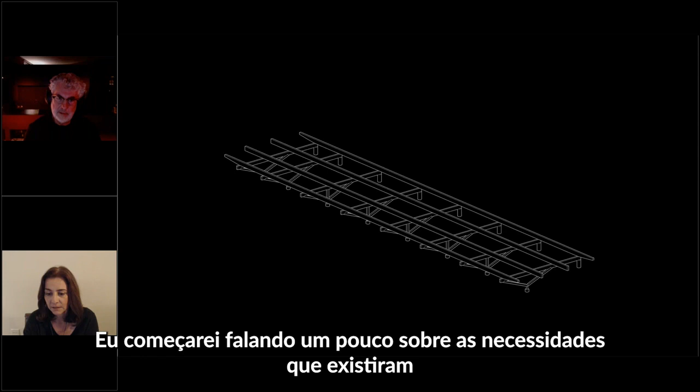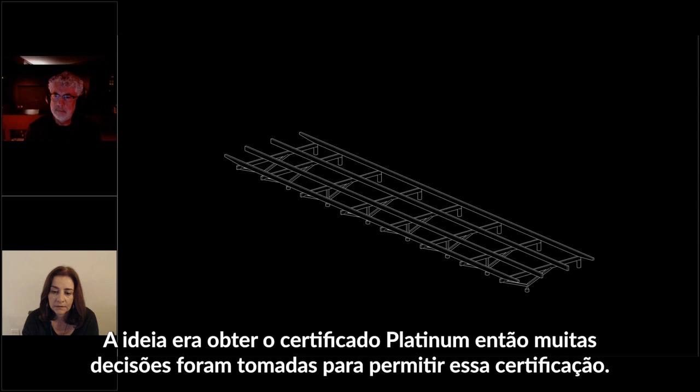The sustainability was something that was necessary. So the first thing was, when we thought about how to assemble the house, was to create a structure that could be fully produced in a factory and then brought to the site and assembled in a very fast and clean way. The idea was to reach the platinum certification, so many decisions were taken to allow this certification to happen.

The first thing was to keep the land in a very permeable way. So we touch the land in very few points. There are some concrete supports that hold the structure, and above those supports, it's fully a wood structure.

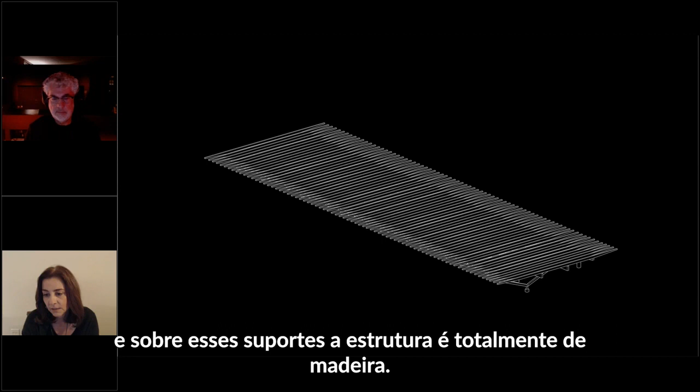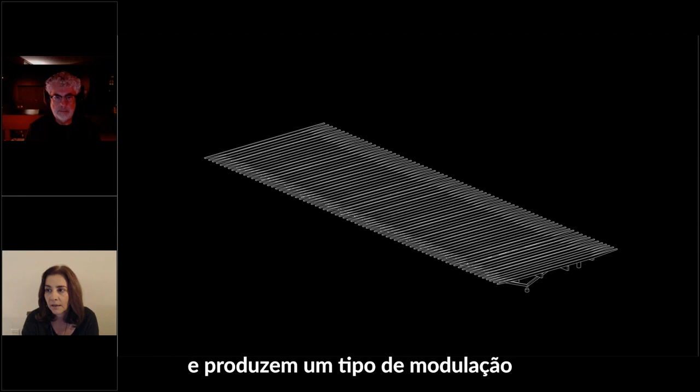The first slab is not a slab, it's a floor structure that holds almost the full house. And from that floor structure we have the columns raising and producing a rhythm, a kind of modulation that can sustain all the program of the house, that organizes the program of the house.

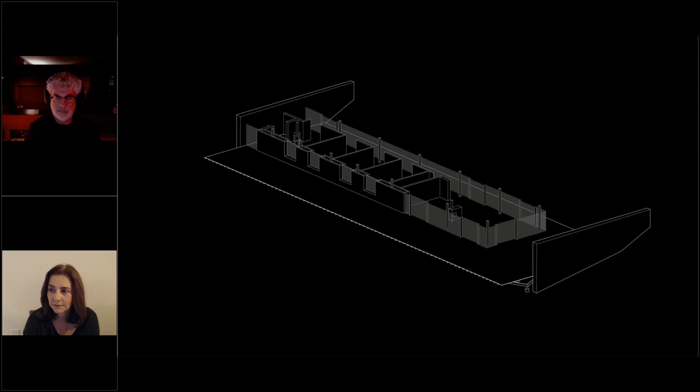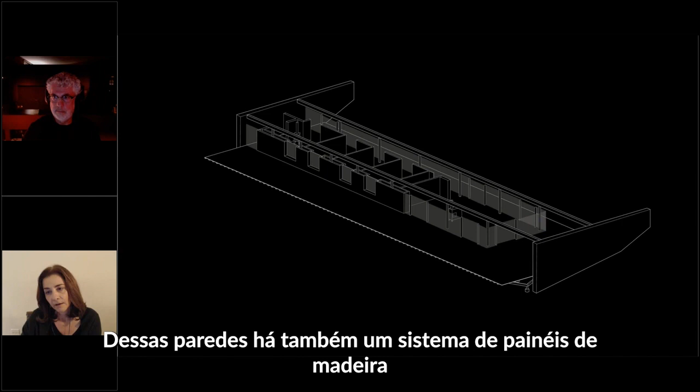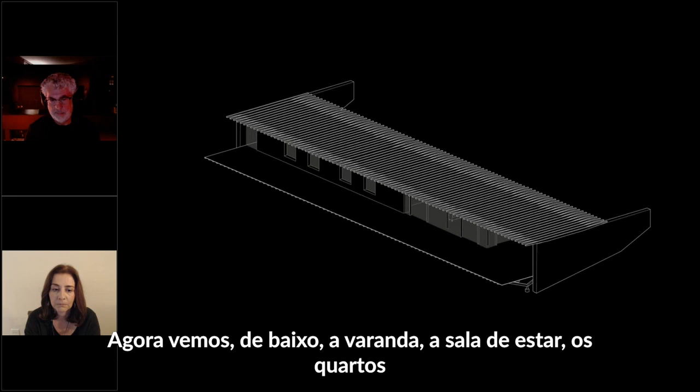I think the slides are passing very slowly, I'm sorry about that. So now you see the full structure, and after that what we see wrapping the house is the wall system. Those walls are also a wood paneling system protected by an insulation PET membrane that helps the insulation of the house. From those spaces we see, from the bottom, a veranda, the living area, bedrooms, and a big open space connected to the view.

And this is the reason why the client chose this beautiful location. It's a mountain location with a beautiful view.

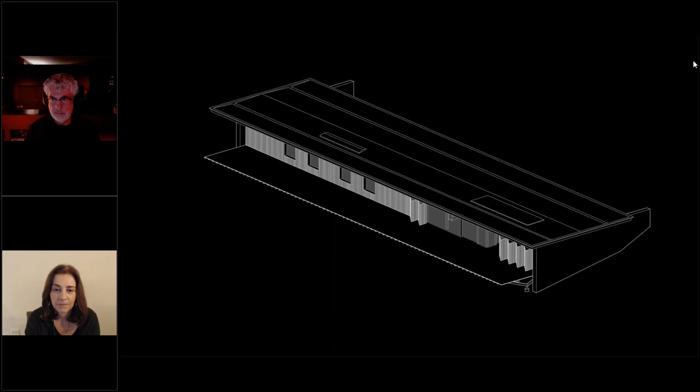The wrapping system, the facade system, is also in wood. We have some sticks that clad both the solid parts of the walls, and also protect and create a light filter in both the living and veranda areas.

So this is the house floating in the mountains and floating towards the beautiful view. All the elements were in wood. Also the glazing panels had a wooden frame around them, and the decking area is fully permeable.

Just in the internal areas of the house we see some cladding, some clad tiles on the floor. And the light filter, the light coming through the view, creates the full light effect on the facade.

The second example is the Micasa Volume C, located in São Paulo. The idea was to create a big cube, 15 by 15, without any columns in the center.

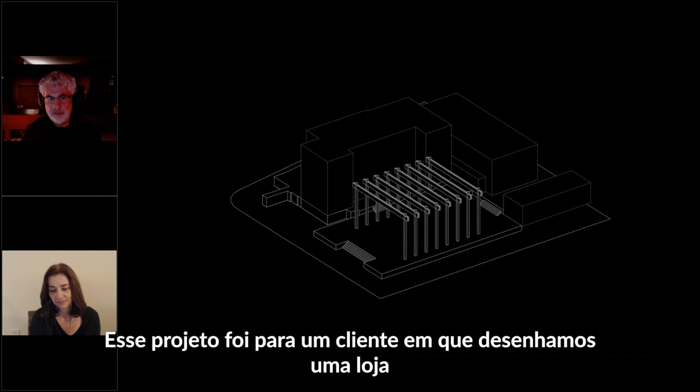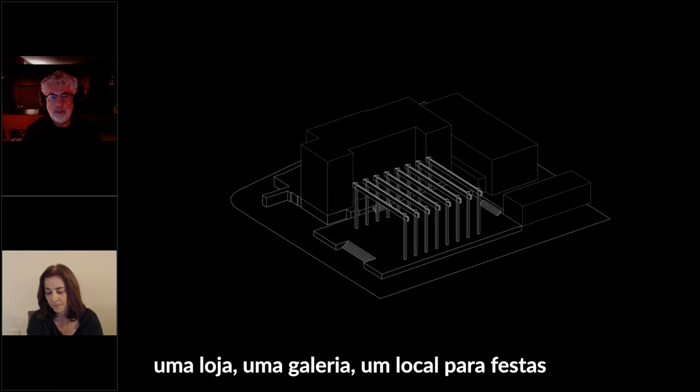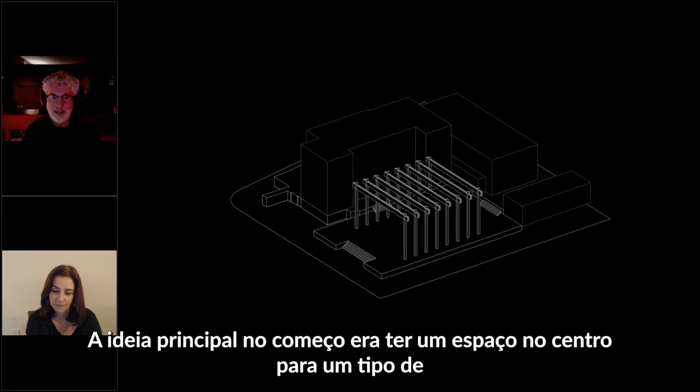This is for a client for whom we designed the shop, the other pavilion that was Volume B. The idea here is to transform this space for different uses, like a shop, a gallery, a place for parties. The main idea in the beginning was to have a space for a kind of vintage motorhome, to serve as an artist residence that could work there. In the end they decided not to have this element inside because it was too big, but it was prepared for it.

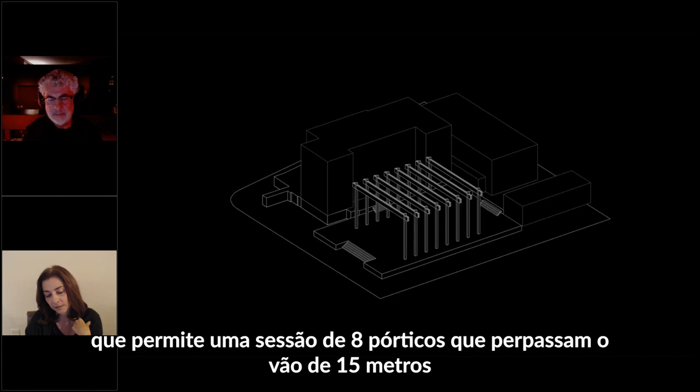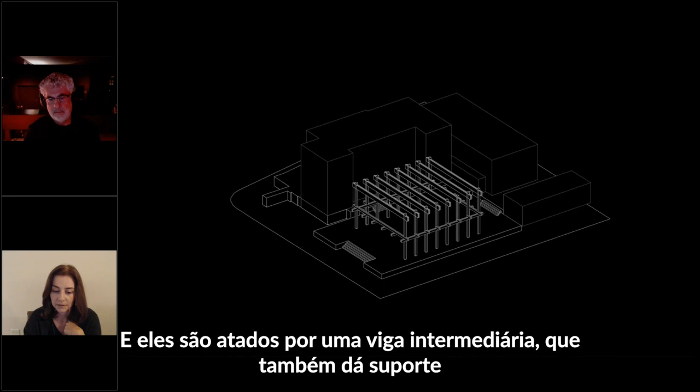So the need of this flexible space has driven the structural system to allow a sequence of 8 portals that overcome a 15-meter span, and can move a little bit. They are locked by an intermediate beam that also holds extensions to support the facade material.

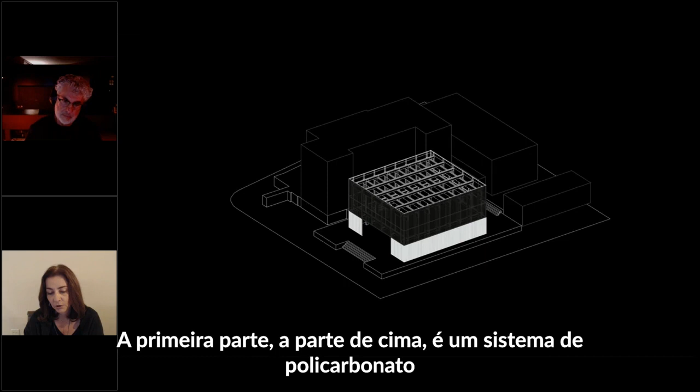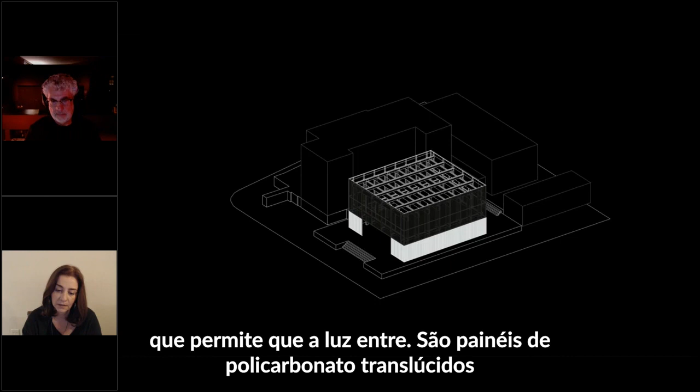So the roof and the facade are kind of connected to this structure. The top part is a polycarbonate system that allows light to enter through translucent polycarbonate panels, and on the bottom you have corrugated metallic sheets that wrap the building.

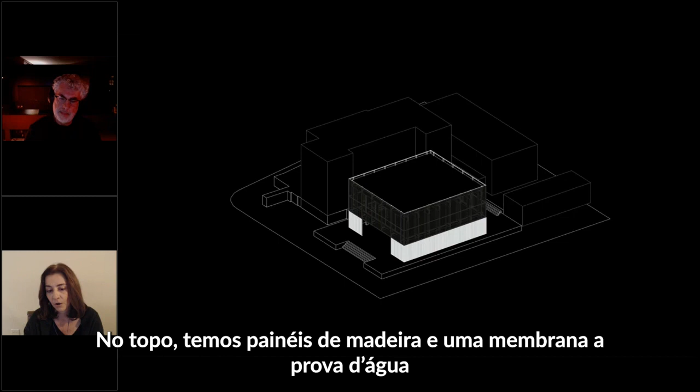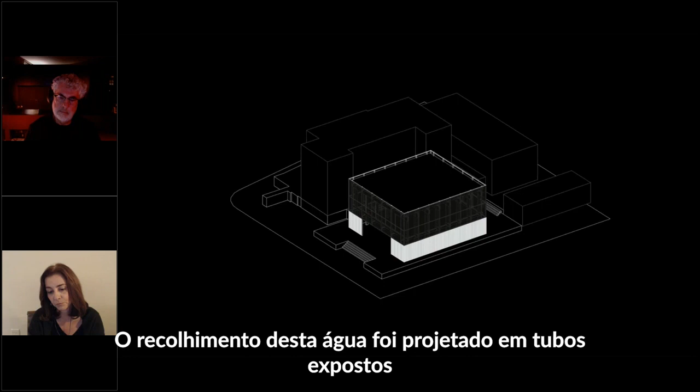On the top we have wooden panels and just a waterproofing membrane, and all the rainwater gutters run on the boundary of the building. The collection of this water was designed as exposed tubes that run behind the column, so you don't actually see them, but they are fully exposed.

It's important to say that this project and the previous one had the structure produced and designed by Carpinteria. So this is a case where the structure works as the interior space — it's something that conforms the space and acts like the interior expression of the building.

The facade is just a wrapping system that protects from the rainwater, but the space is really written by the inside.

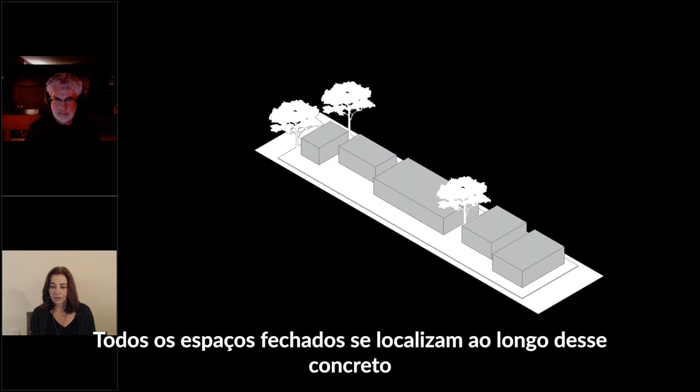All the enclosed spaces are along this concrete area, and they are independent from each other.

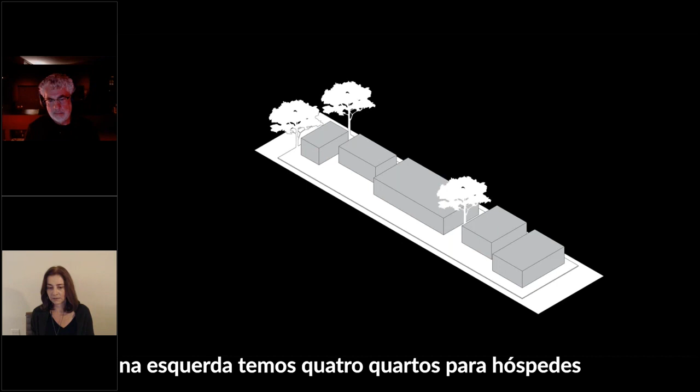In the center you have the master bedroom and living area. On the left you have 4 guest bedrooms, and on the right a dining area and kitchen.

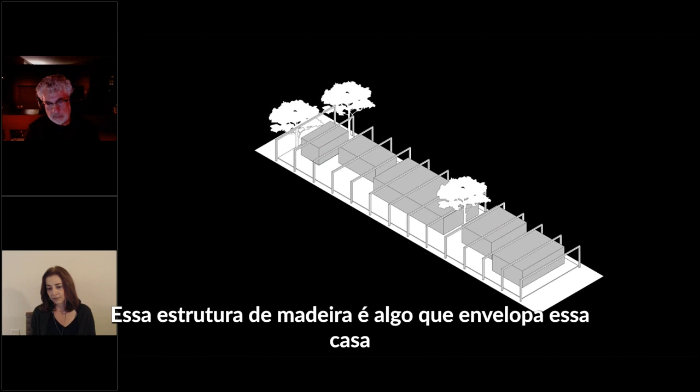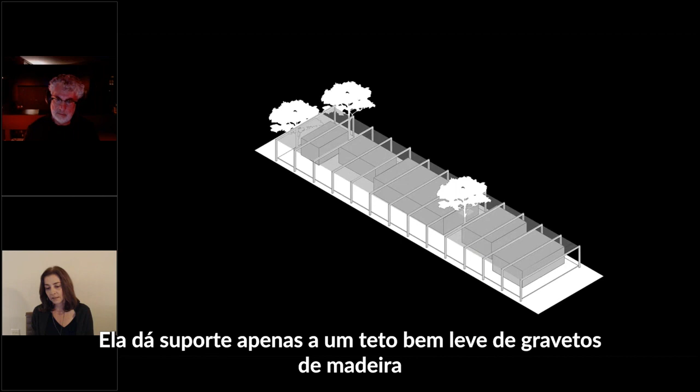This wooden structure wraps the house and creates a sort of intermediate space between what is actually inside and what is outside. It holds just a very light wooden stick ceiling that is not rain-proofed, but has a role to create shadow, like the trees around in the forest.

So this is the condition of the building — fully wrapped by the forest — and the role of this intermediate space is to create this in-between condition of what is inside and what is fully outside.

It's a place to chill out, to meet friends, to meet people at night, to have a guest, having a glass of wine. It's a space where you can enjoy nature and be outside, not in, as we are in the cities — in Bahia you are allowed to be outside for many moments. It's a pleasant way; the shadow is special in that sense to create this space where you can be.

These shadows and light effects can touch the volumes and move across them, creating different expressions and atmospheres during the day, but always very connected to nature.

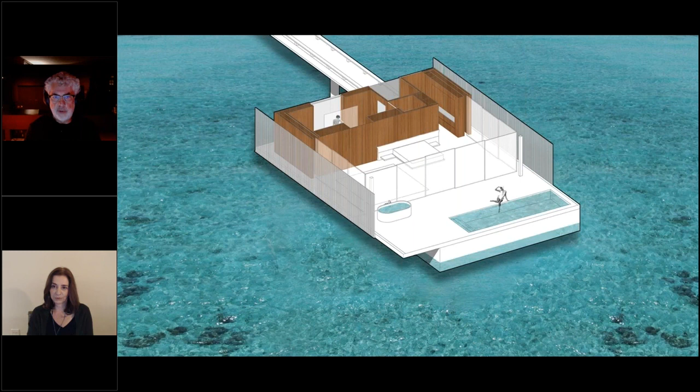We have some art pavilions in some places on the island, and this one is a James Turrell pavilion. Not this one — this is the home, but Renata will show the other one, which is a very interesting project we built.

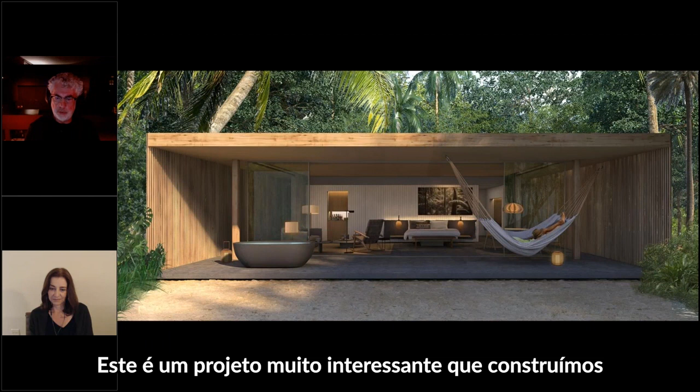I think the connection here with the first impression was the desire we had when we started designing the hotel: to create an architecture that could be embraced and surrounded by nature. We thought this is a site where the nature, the light, the sea and the sand, everything is so overcoming, so awesome, and it's very difficult to compete with it.

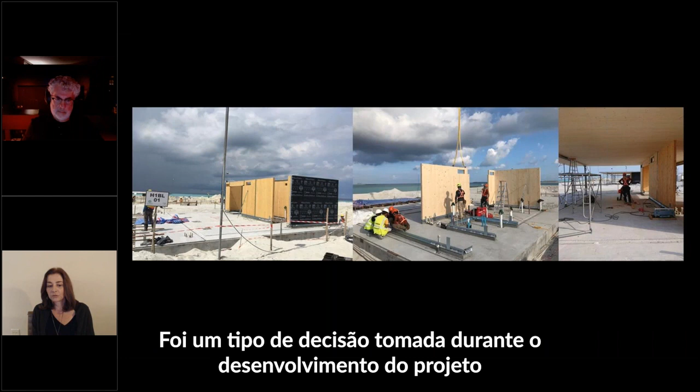It was a decision made during design development, because the construction company realized the CLT panels could work not just as structural elements, but as a wall system as well. They would work as a wall system that could bring all the perforations for the air conditioning ducts, fully made at the factory. So everything contributed to gaining speed in construction, and it proved to be a more cost-effective solution.

Our design was not prepared to show the CLT. It was not our first decision, and at the end it was not exposed, but it was a lesson we learned about how to use the system to gain efficiency and speed in such a complicated, remote location.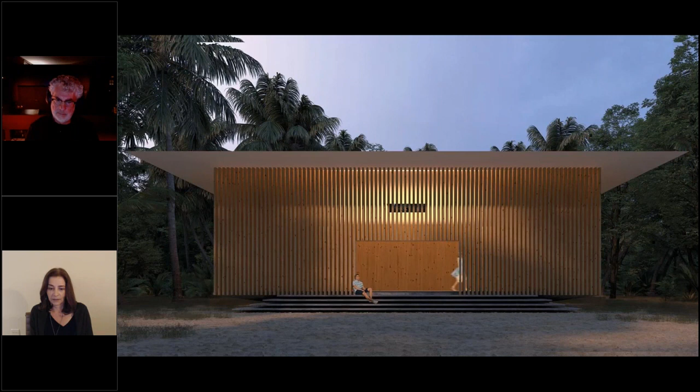This is the James Turrell Pavilion, a totally different situation. In this case, we decided to show the structure. This is a site-specific piece for James Turrell, a sky space — a space where you can enjoy this sort of disturbing view of the sky, where you don't know if it's a sky or a painting, but it's actually a hole.

So the main character here is the roof. The idea was to leave the roof, keep the structure on the boundaries, and hold the roof without any columns. So the facade became the structure.

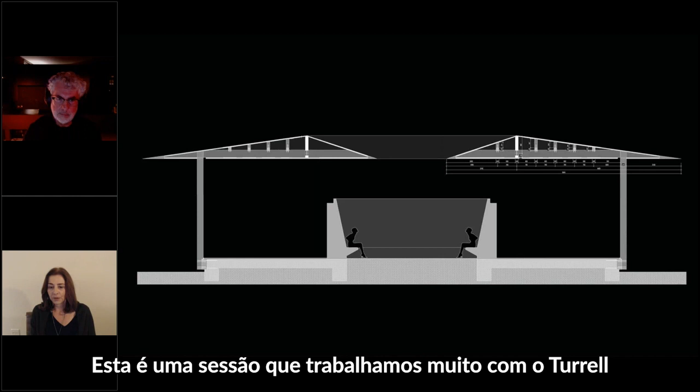This is a section we worked on with Turrell a lot, because it's a matter of proportions. All the roof structure is a wooden frame as well, with wood paneling and a liquid glass fiber paint system that gives this unique surface without any junction lines. This very thin edge is achieved by a metallic piece held both at the boundary of the roof and at the hole in the middle.

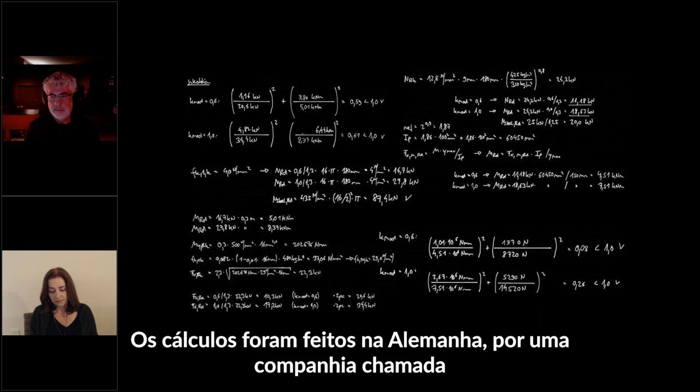It was calculated in Germany by a company called Kempter Fitz, and assembled by a Singaporean timber company called Ventured. So it was fully produced outside the site and just brought to the site in modules.

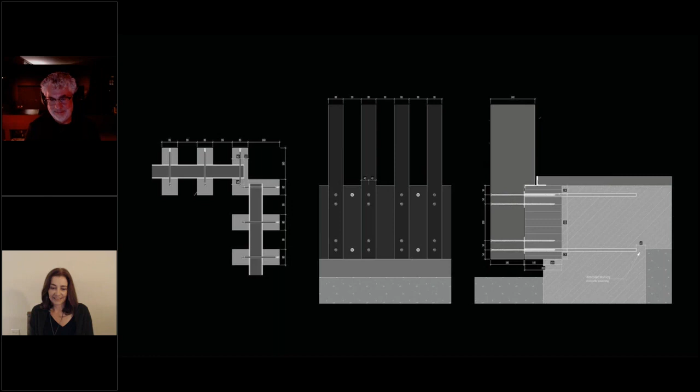The calculation was funny because besides all the digital material we received, we also received a review made by hand — a way to see that people were working, not just machines.

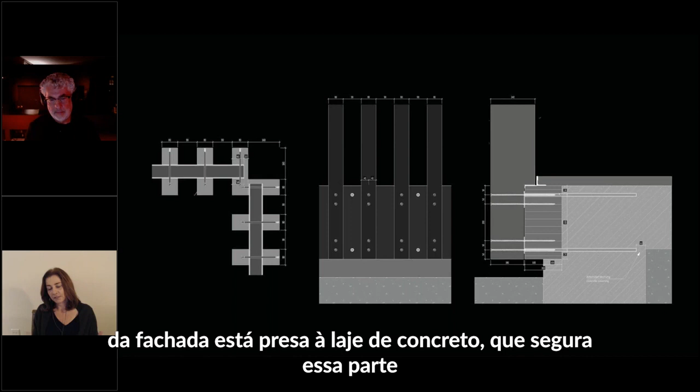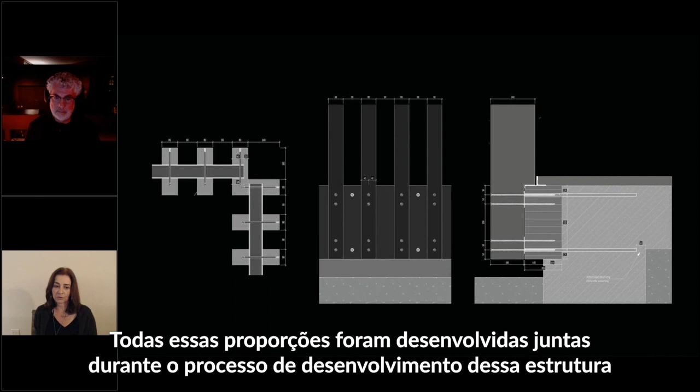This shows some details of the corner in plan, of how the structure facade is attached to the concrete slab which supports this piece. All these proportions were developed together during the process of developing the structure, because the structure actually became the facade material.

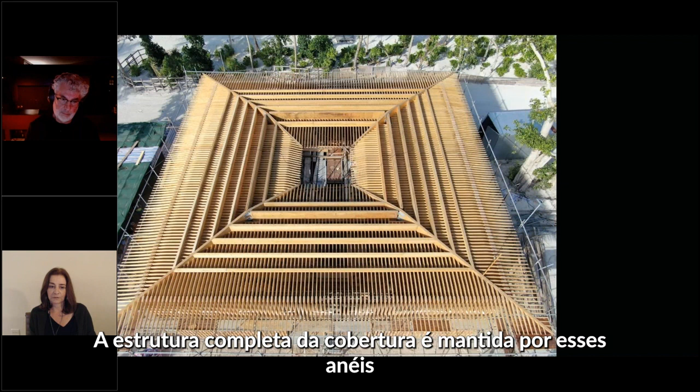This is how they started the construction. They brought the panels in sections. The full roof structure is supported by those rings that bring the load to those diagonals and make it come to the facade line.

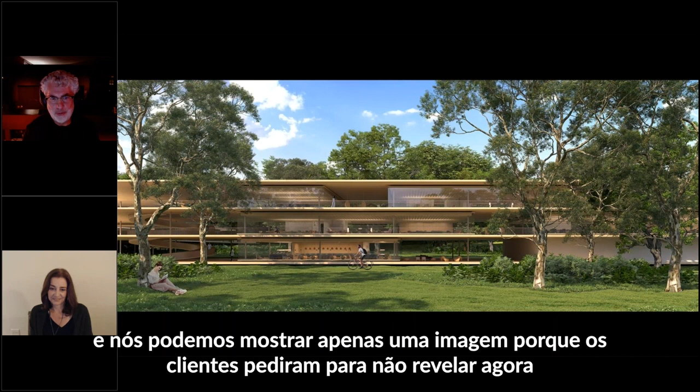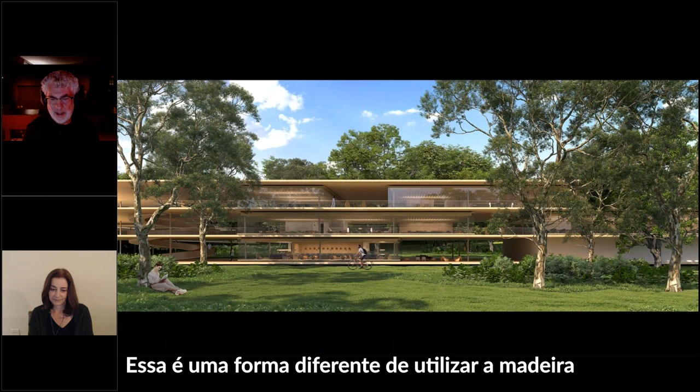The last project is one we're doing at this exact moment, and we can show just one image because the client asked not to show it. I can show it now because there will be an opening for the press to show the whole project — and this is a different way of using wood.

Since the beginning it was a modulation — we decided to use the CLT wooden structure in modules, so the building can be extended later or built in sections. The idea was to produce an office space fully connected to and surrounded by nature, but at the same time the wood was brought to the project as a sustainable point, because we wanted more than just construction speed and efficiency.

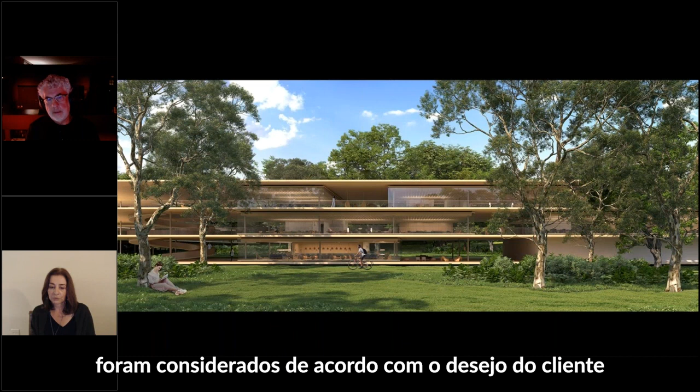We wanted to reduce waste in construction — all those construction points were also tied to the client's desire for a fully sustainable project. So all the solutions were driven in that direction, and I believe it will be a very nice project in the future. We are moving in this direction.

So that's it. I just want to say one thing to Kengo Kuma.

We met in New Orleans exactly 10 years ago — it was May 20, 2011 — and since then we've met several times around the world. I'd like to say one thing: he's not only a great architect, a top architect, but more important than this, he's a great man, a great guy. That's it.

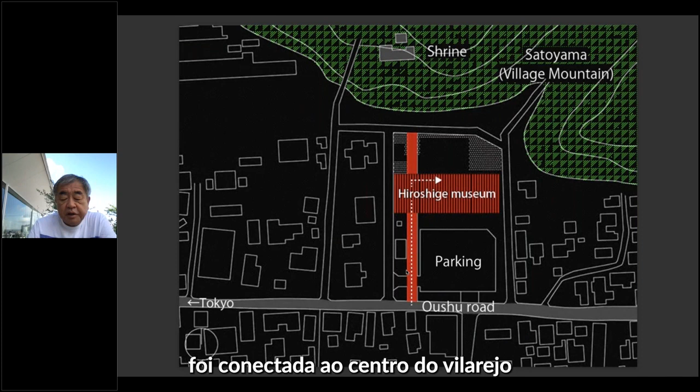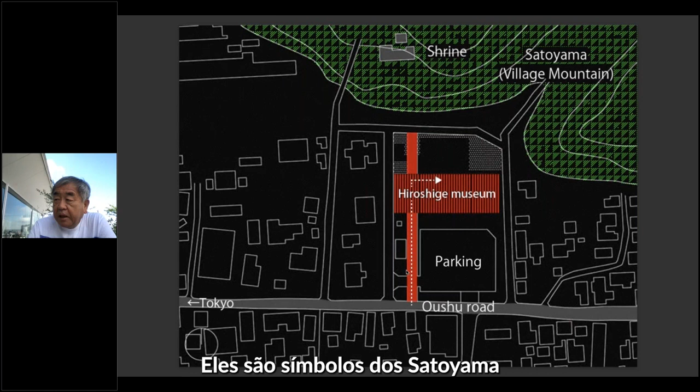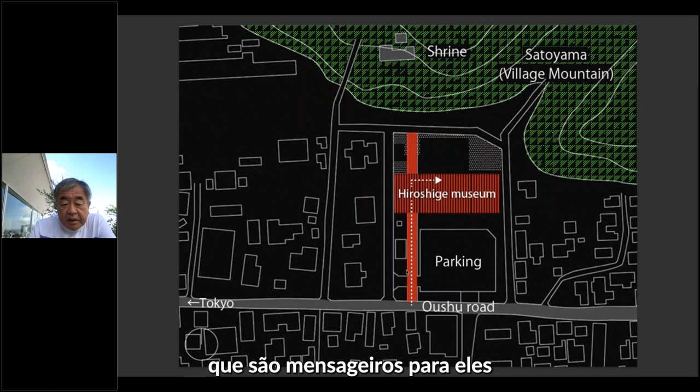And at the edge of Satoyama, the people always built a shrine. The shrine was a symbol of Satoyama, and the people respected the god of Satoyama, so they always built a shrine. The shrine sends a message to them.

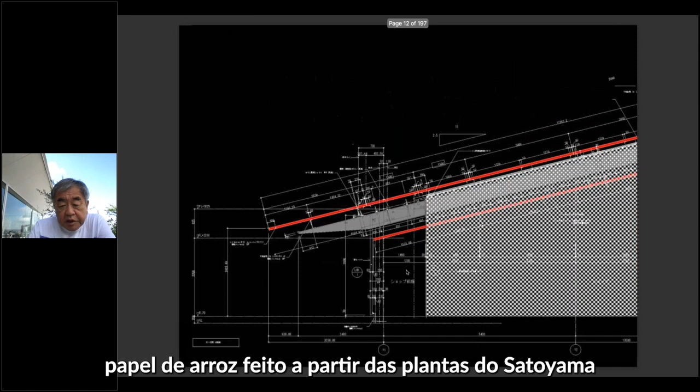Material-wise, we used Satoyama wood and rice papers that came from Satoyama plants, and also stone from the quarry of Satoyama. We also worked with craftsmen living in the village. As for the roof, we also could use wood, as it's a new technology coming from the tradition of thatched roofs in Japan.

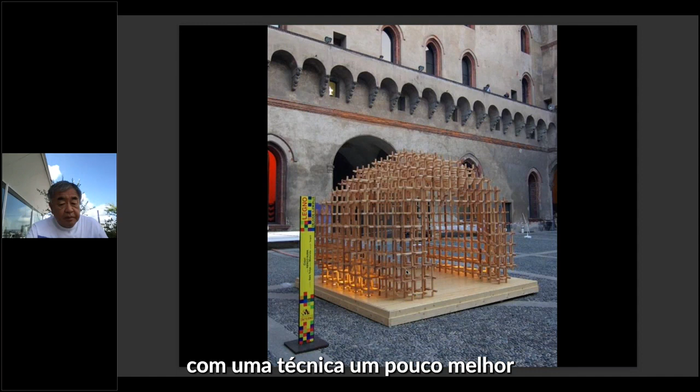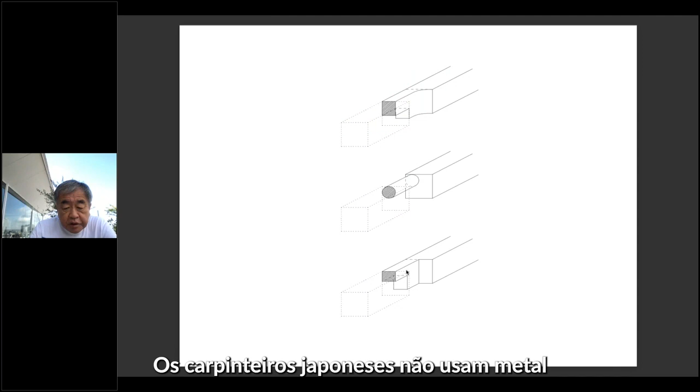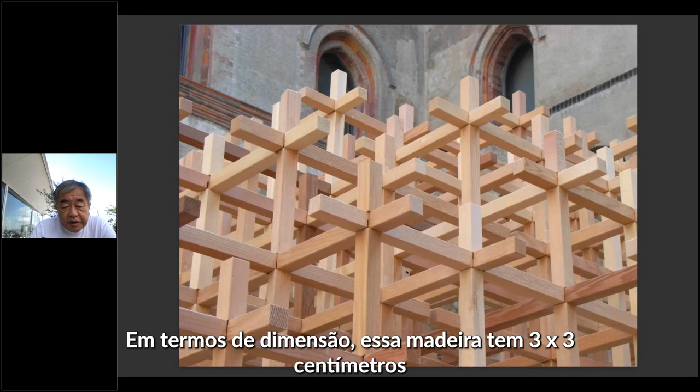It's a small pavilion we did in Italy, but the technique came from the traditional joinery system of Japan. Japanese carpenters didn't use metal, and always cut the wood like this to make it fixed. The dimension of the wood is 3 centimeters by 3 centimeters, but it supports the small pavilion.

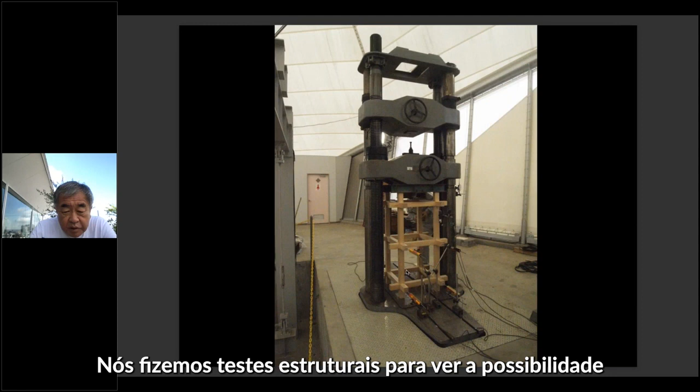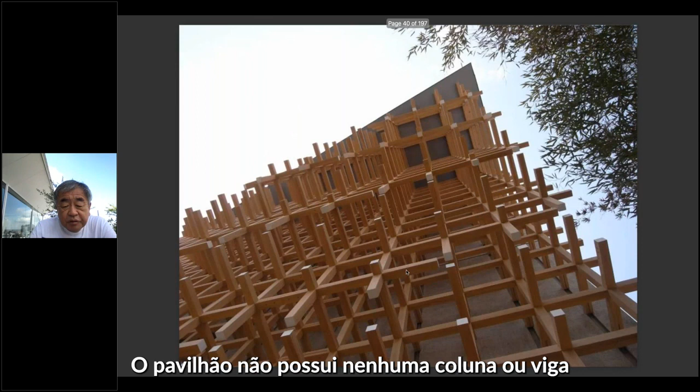After coming back from this pavilion, I built a 10-meter-high building using the same system. We tested the structural possibility of this joint system, and finally a 6 centimeter by 6 centimeter grid, with 50 centimeter spacing, supports this 10-meter pavilion. There's no column and no beams—only the grid is supporting the building.

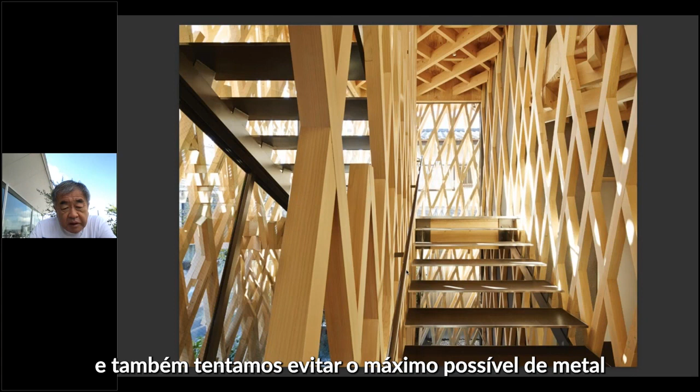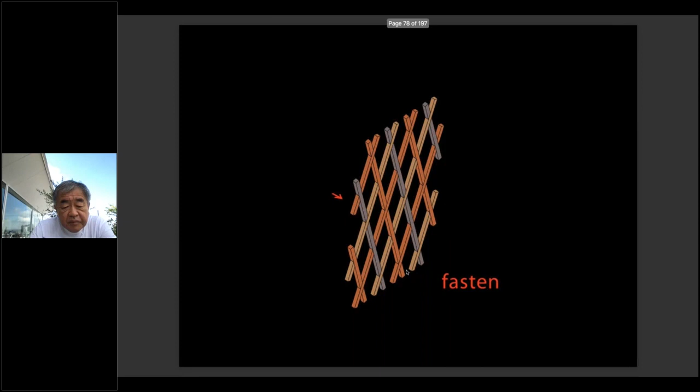After testing this Starbucks pavilion, we designed a 3-story building in the center of Tokyo. The dimensions again are 6 centimeters by 6 centimeters, and we try to avoid metal as much as possible. This is the joinery system—simply put, it's a 3-layered system. Two layers is not strong because it's slidable, but 3 layers is not slidable, and it can fix the building easily.

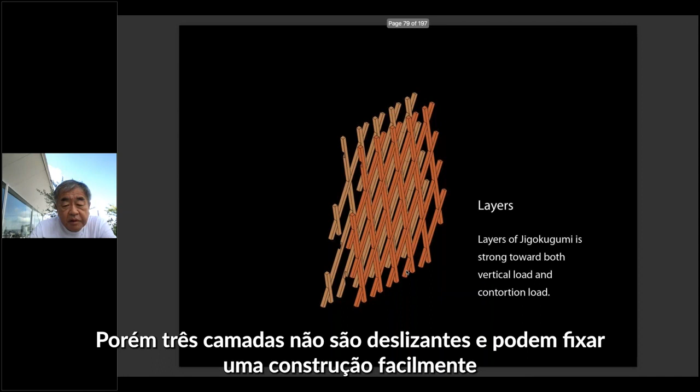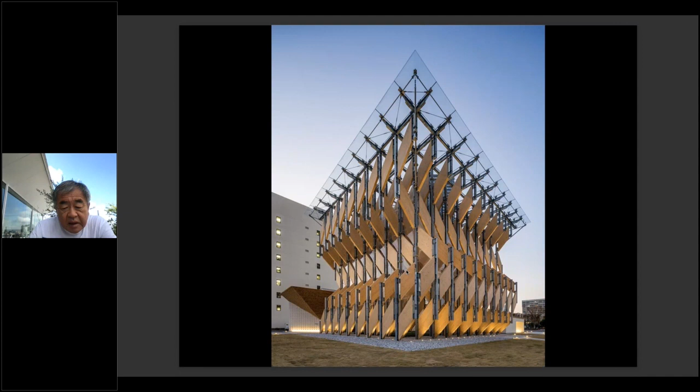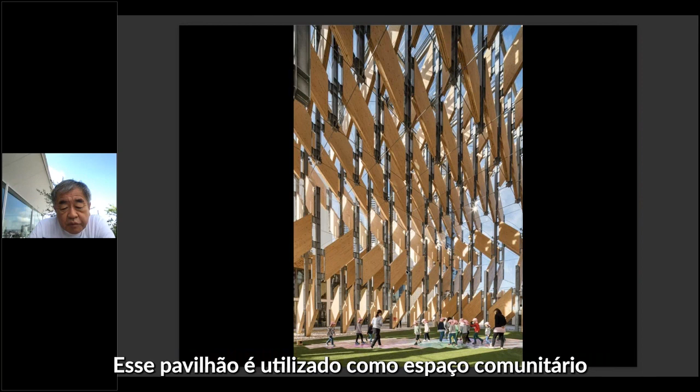Recently we've also been working with CLT, and this is the CLT pavilion in Harumi. CLT is sometimes used for solid, enclosed buildings, but this CLT pavilion is very open and transparent. We combined CLT with steel beams to create this open feeling. This pavilion is used by the community, and kids enjoy this pavilion.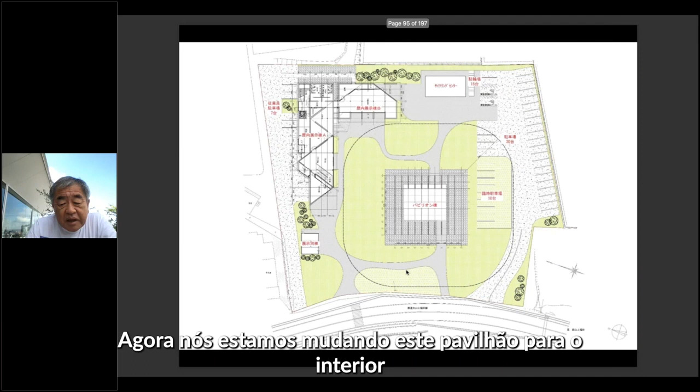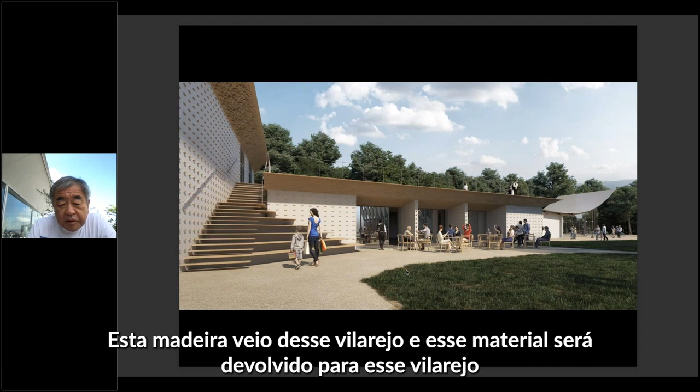Adjacent to this pavilion, we designed a small wooden museum. The stairs and the furniture are all made from the same wood. Now we are moving this pavilion to the countryside—this wood came from that village, and we are returning the material to the village. They also want to use this as a new community center.

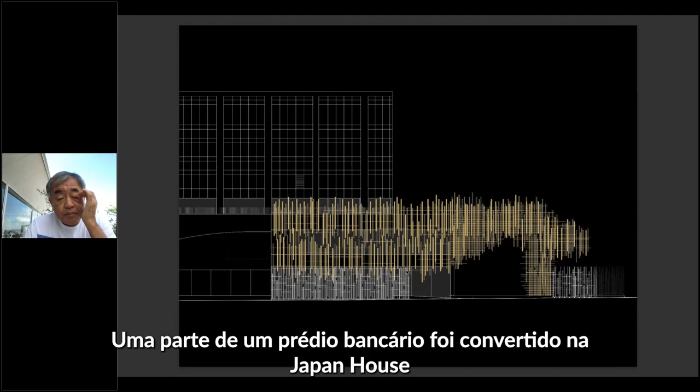In Sao Paulo, we were lucky to design Japan House, on Paulista Avenue. Part of a bank building was converted into Japan House, and we worked with Japanese carpenters, combining Japanese wood and Brazilian wood.

The dark color came from Brazil, as a symbol of exchange between Japan and Brazil. There's a white string which is carbon fiber, and the carbon fiber is supporting the structure.

For interiors, we use this as a screen. It's a metal mesh with rice paper liquid. Craftsmen came to Brazil and worked with young Brazilian workers to create this unique screen.

This is a bamboo sculpture, also a very unique technique. There's no glue, no metal.

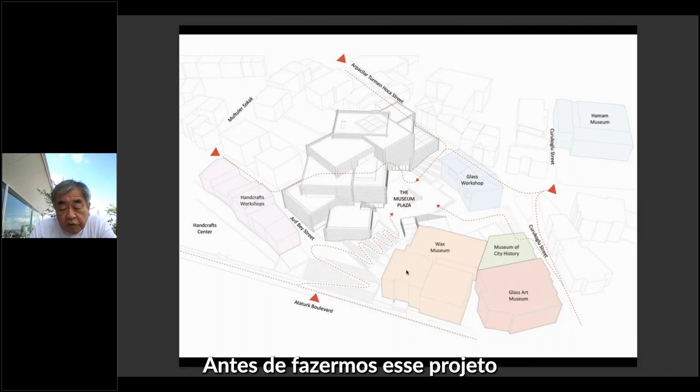In Turkey, we also work with local material. This is a museum. Before working on this project, we thought Turkey was a country of stone and brick, but historically, in the Ottoman period, they were building wooden buildings.

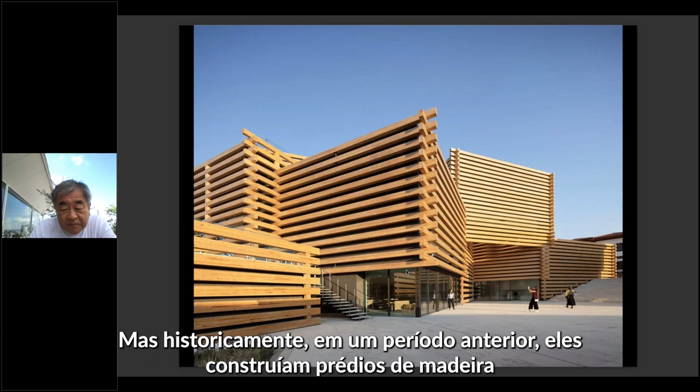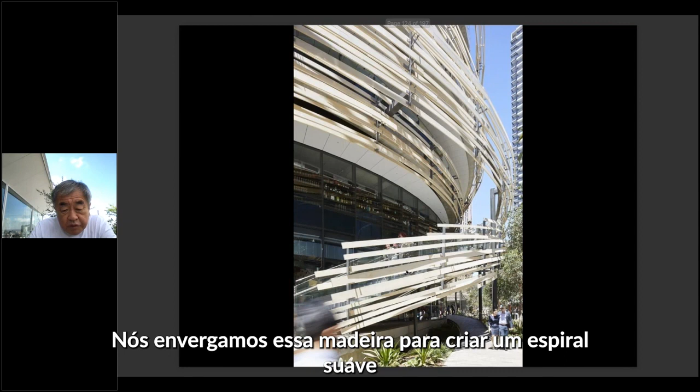In Australia, we designed this as a community center. We bent the wood to create a soft spiral, because we thought softness is very much needed in the city. Most new buildings in Australia are high-rise residences, and the density of high-rise residence is not so comfortable for a big city, we thought. This community center combines a small market, kindergartens, a community library, and restaurants.

And this stadium, for the Olympics planned to open in July next month, but nobody knows if it can really be opened or not. We designed this stadium made of wood, using wood from every prefecture of Japan.

Japan has 47 prefectures. For the south side, we used wood from the south part of Japan. The north facade uses wood from the north. We also tried to combine the wood and vegetation to bring the breeze into the building.

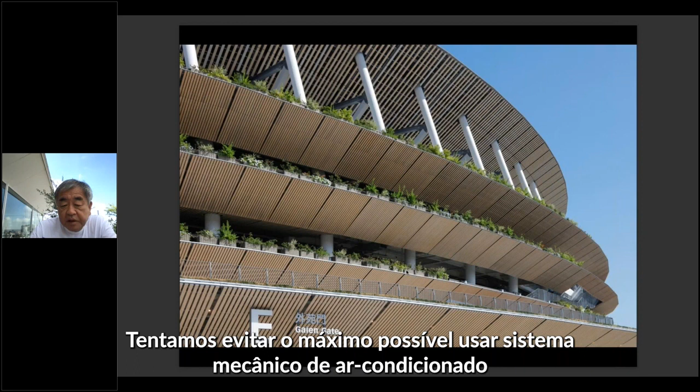We try to avoid mechanical air conditioning systems as much as possible, and wood sometimes works as a filter to control the natural wind coming into the building.

The section is the same as in famous temples, pagodas. The layers of the roof protect the building from natural light and bring the wind to the depths of the building.

And wood is good for this kind of public building, we think. The structure is a composite of steel and wood.

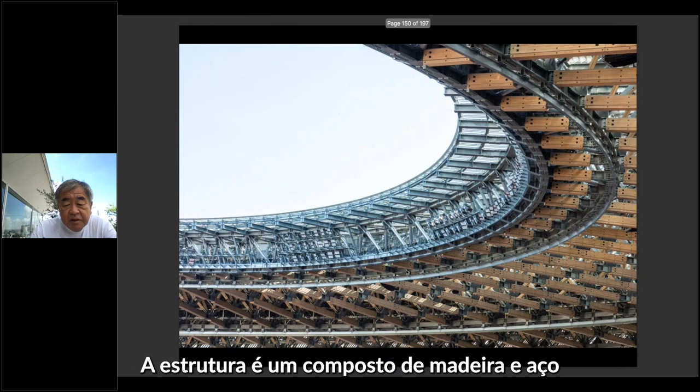It looks like it's full of people, but actually it's empty, because the colors of the seats are mosaic, making it look fully occupied.

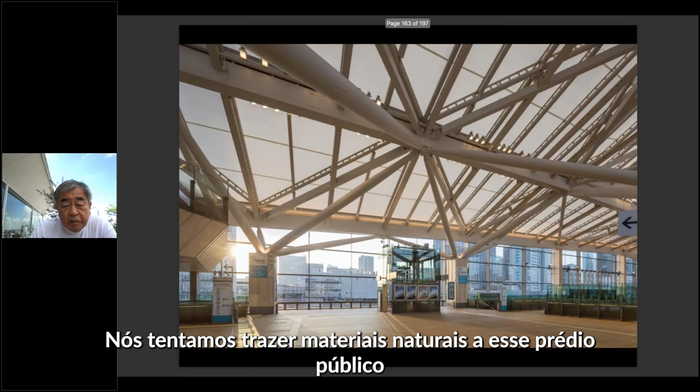For the station, we also used wood. It's a big station in the center of Tokyo. We tried to bring natural material to this public building.

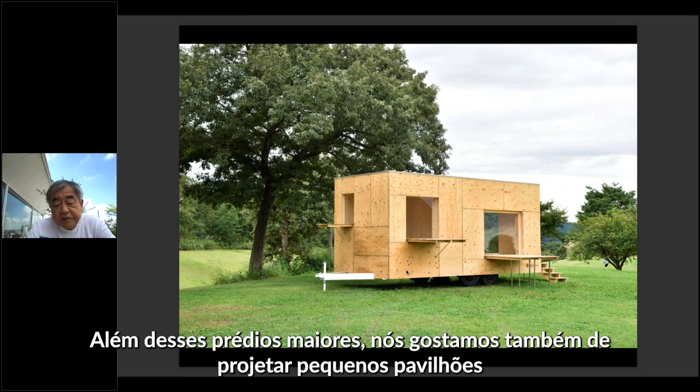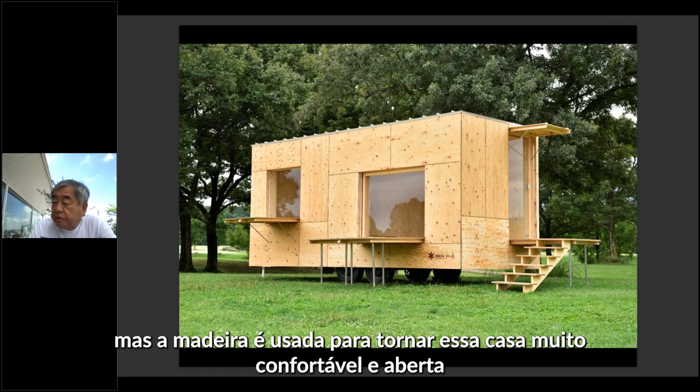Besides those bigger buildings, we like to design small pavilions in wood. This is a trailer house made of wood. The dimensions aren't big, but using wood makes this small pavilion very comfortable and very open.

We are also challenging a new kind of wood block. The Western wood block is a kind of brick, but this is a kind of Japanese wood block. It is very transparent and very light.

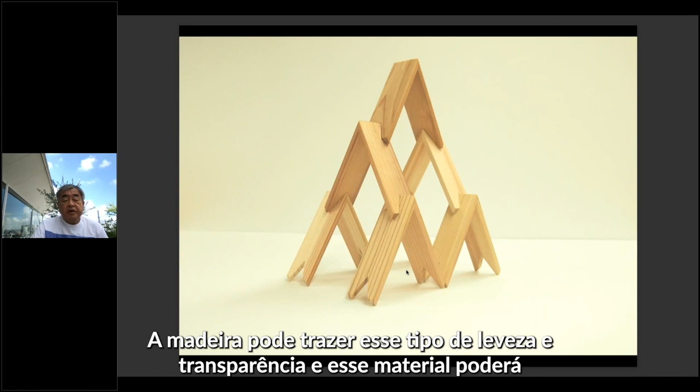Wood can create this kind of lightness and transparency, and I think this material can open up the future after the pandemic. Thank you very much.